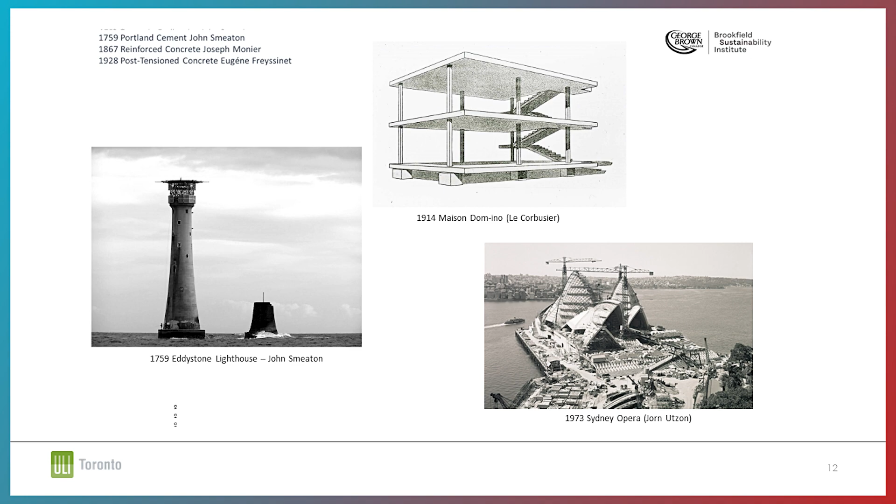This was happening at the beginning of the 20th century, around 1928, and at that moment Eugène Freyssinet, a French engineer, understood that if you put some iron and apply tension, you can have post-tension concrete, allowing big spans and new kinds of surfaces. This is the technology that allowed Jørn Utzon to give us the Sydney Opera House.

So the important thing here is to understand that some aesthetics, some architectural decisions, happen because of certain technologies. That happened in the 20th century, and now we are in the 21st century, and now it's the moment of wood, timber, mass timber. I think that's why we are here.

So the story of timber is the story of a problem: we have the limit of the length of the tree. You can use timber for structural elements however you want, but you're limited by how tall the tree is. Maybe here you have taller trees, but in Europe our trees are not that tall.

There was this French architect who wrote a book describing a way of joining small elements together to make a big element. It was called Philibert de l'Orme. So the De l'Orme system is how to join small elements just to make a big element. This is the key to timber, and the evolution of timber is this.

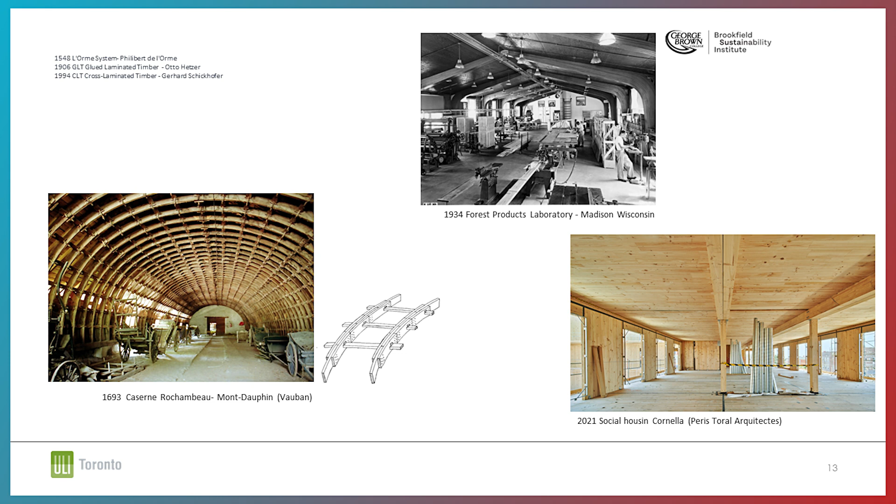It was used to do the coverings of castles and many churches in Europe. In 1693, you can see this caserne, which was a military element. Then at the beginning of the 20th century, there was this German engineer, Otto Hetzer, who understood and designed a way to glue timber.

So we don't need to make small joints, we can glue it in a way that it's able to resist exterior conditions, and that brings us to glulam.

So all through the 20th century, we had glulam. Here's one example of the first buildings made in America. I think this technology came to America in the 30s, and many churches and elements were built with it. So we have this potential: if we're able to glue it, we can have a linear element, but only in one direction.

But it can also give us the aesthetics of having big spans. And finally, in 1994, from the University of Graz, Gerhard Schickhofer invented cross-laminated timber. This was the big change, the big revolution, because now we're able to have elements in two dimensions. Before we only had the line, but now we have the plane, so we can work with this plane.

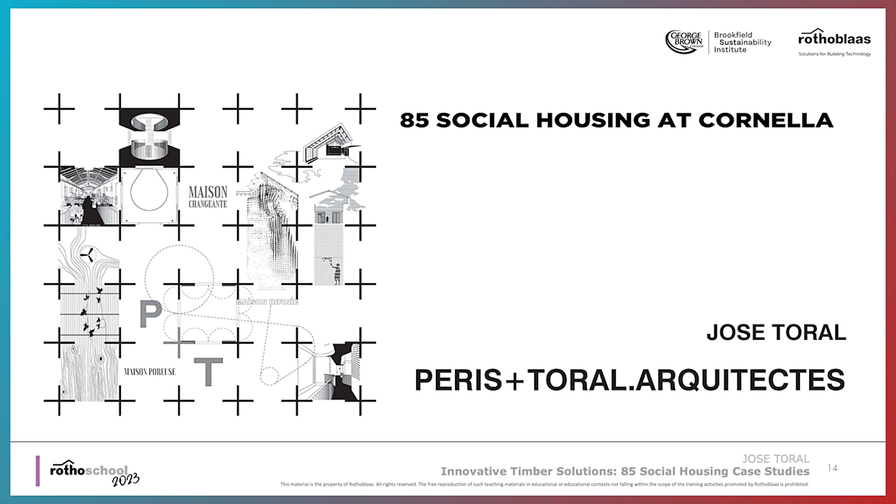Normally, from the technology to the architecture, it takes around 50 years. So we are now in a moment where we have to develop this technology. I will explain a project from my office in Europe that tries to show one of the possible solutions, but there are many others. I just wanted to show this evolution to understand why we're talking about mass timber.

It's because new technologies have come about, and we have to understand that some are good for our CO2 emissions, and that we have to work together on how this can be solved.

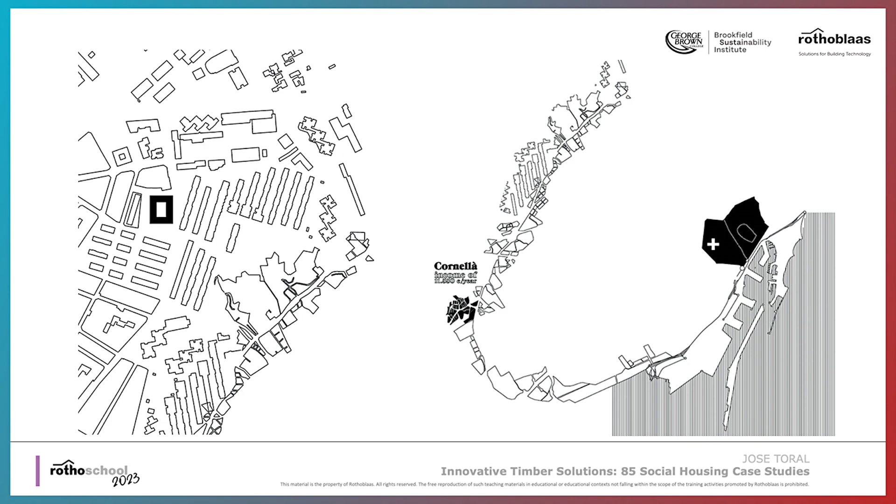Okay, this project is in Cornellà, but for you it's like part of Barcelona. Here you can see the city center—I don't know if I can point, it's a bit difficult—this is the city center of Barcelona, and this is the highway that goes around. So it's here. The important thing is that it's a very low income area, only 11,000 euros per year, so it's not the richer part of Barcelona.

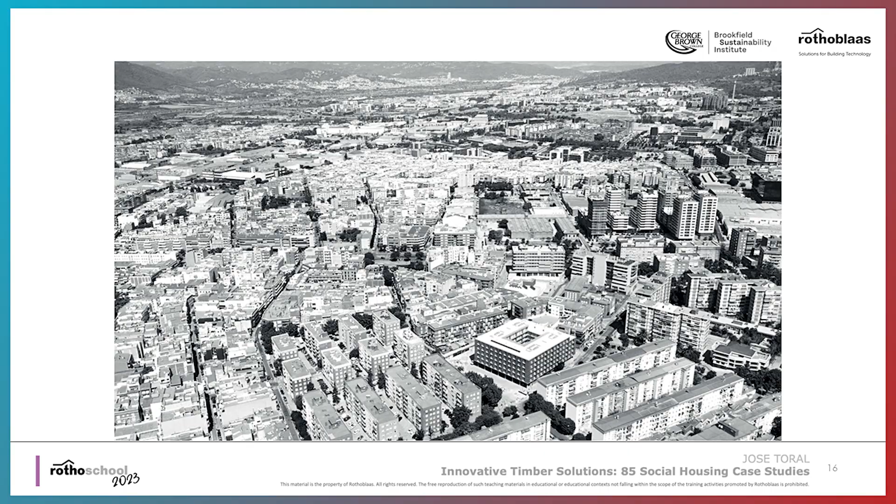This was built in the 60s with this polygon, with these block systems. And on the plot where our building is, there used to be a cinema. So people were not very happy when we decided to put a building there, because even though the cinema was closed, people would have loved it to be reopened.

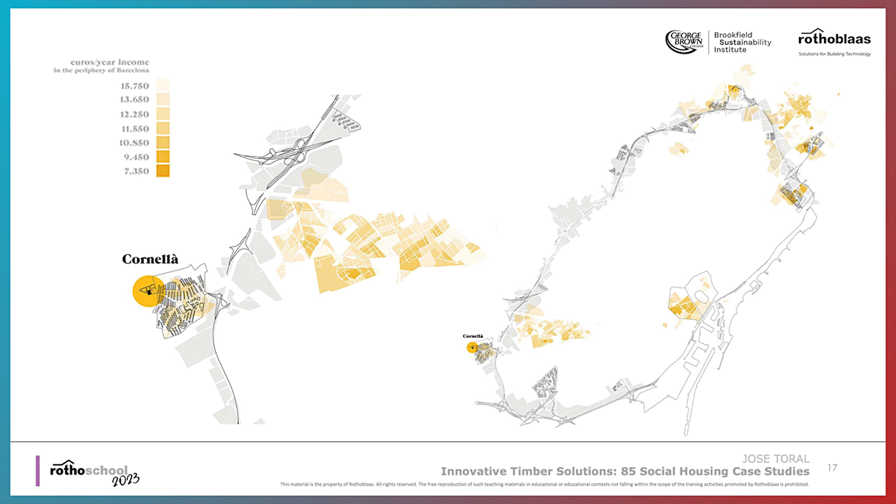But okay, here is the map, to understand Barcelona—this is the city center, and these are all the neighborhoods around it. Here the colors show the annual income, the darker meaning lower annual income. So it's a poor part of Barcelona city.

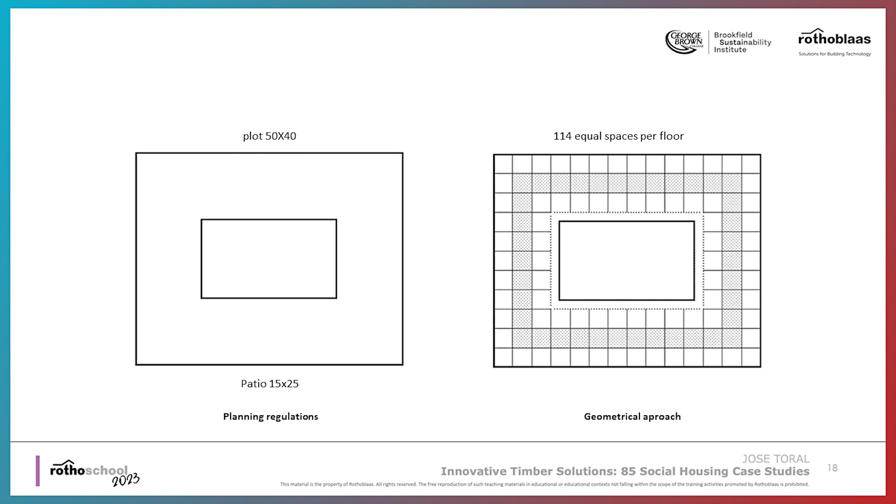We found this competition. We had this plot, and the planning regulations were very strict—they said you have this plot of 50 by 40 and you have to make a patio of 15 by 25. We weren't sure about entering the competition, but we decided, okay, we can't decide the answer for the city, but we can try to begin from the interior and give some geometrical approach.

And the question we asked was: how has to be the house of the 21st century? We thought it has to be different in some way. The idea we had was changing the aggregation unit. Normally you put one dwelling as the unit, the projectual unit, but we said maybe the unit has to be the room.

So what would happen if all the rooms in a house measured the same? Because when things measure the same, there is no hierarchy. For us, what links the project to the 21st century is this no-hierarchy situation. We think new kinds of families, even the nuclear family, don't need any hierarchy—it doesn't make sense that the parents' room is bigger than the children's room.

So if you have a house where all the rooms measure the same, it's more equal and more democratic, it's also more flexible, because when things measure the same you can interchange them—you can just move the furniture. But the question is, what should be the size of a room for this to happen?

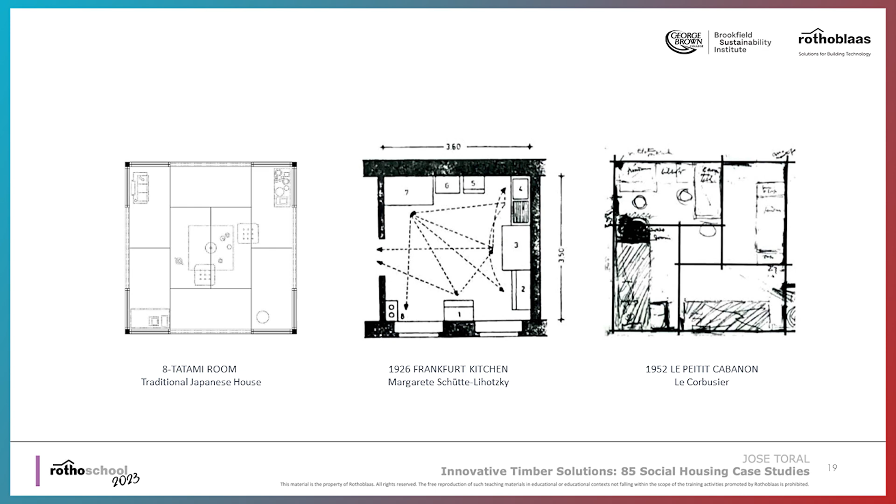We took this reference—my partner Marta made a PhD about the Japanese house. We found a very nice thing: in Japan they don't call rooms by their use, because the use changes during the day. Instead they call them by their size.

The size is based on the tatami. A tatami measures 90 centimeters by 1 meter 80—that's the size of a person lying on the floor, so more or less like a bed. This is an 8-tatami room, which measures 360 by 360, nearly 13 square meters.

The important thing is that the openings are double openings, so we have these porosities. So we decided to do the competition using this matrix of rooms measuring 360 by 360.

Afterwards, we found that the Grete Lihotzky kitchen of Frankfurt measured 360 by 350, and Le Petit Cabanon of Le Corbusier measured 366 by 366. So we have the more flexible room, the more technical room, and the room for thinking of Le Corbusier, all fitting in our matrix of rooms.

For the ground floor, we put the cores in the corners and decided that everybody will enter together instead of entering directly to each core from the street. We have a porch, and everybody enters through here. We have this patio as a communal area, and then we enter the building.

This part of the building is made with a concrete structure, so the distance between supports is 7.5 meters. We have a basement because we used to have a cinema, so we have some cinema facilities and a parking area.

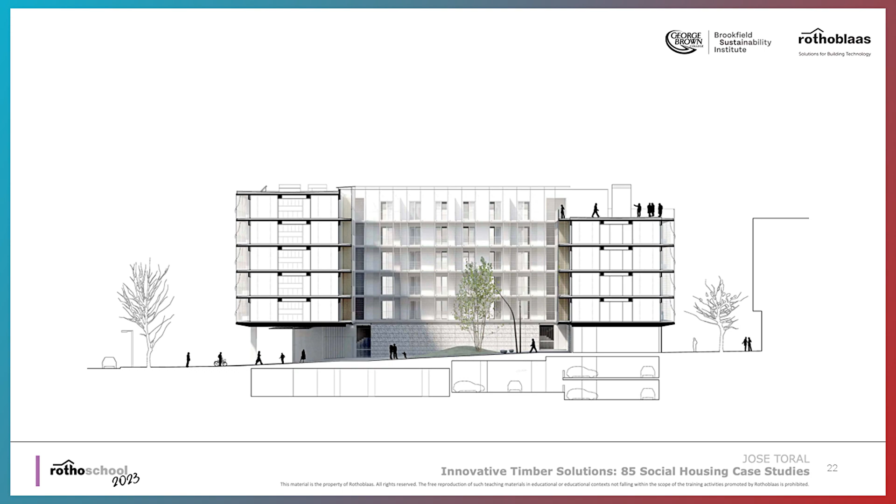It's important here, the section—from up to here you have the concrete structure, and from here everything is made with mass timber. We have this porch, and from the porch you enter the patio.

The important thing here is that this faces south, so we have hot air facing this facade during the day. But because we have the porch, this is very cold air, and cold air moves toward hot air—so that generates some microclimate and movement of air throughout the year.

This is the image of the porch and the entrance. For us, it's important that everybody shares the entrance—instead of having 4 communities, we only have 1 community. You can see the concrete structure up to here, and then the rest is all made with mass timber.

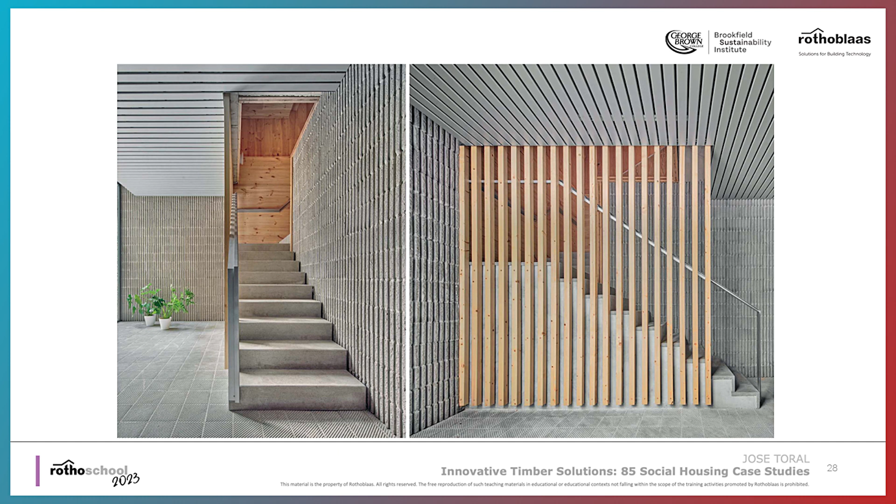You're entering—for us it's important for it to be closed, but not with a fence, more with a filter, because of the importance of transparencies. We're entering the cores in each one of the corners. Here is the moment where we change from concrete to wood.

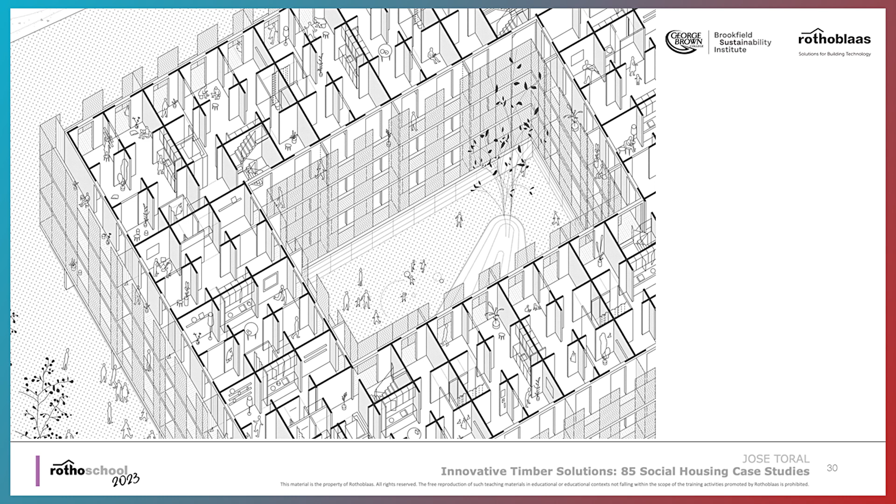And here everything is only wood. This is a stair, all made with mass timber—it came in one piece. I think we'll see some images afterward. All the metrics, all the elements, were fitted into the grid of rooms I told you about, even the stair.

See here, we have this situation of all equal rooms with this porosity between the spaces. So the importance of this plan is that it's not easy to see the limits between the different units or the difference between the communal area. All of them look the same—this is very important for us, this indeterminacy of the spaces, showing that in the future we can rearrange all the elements of the building.

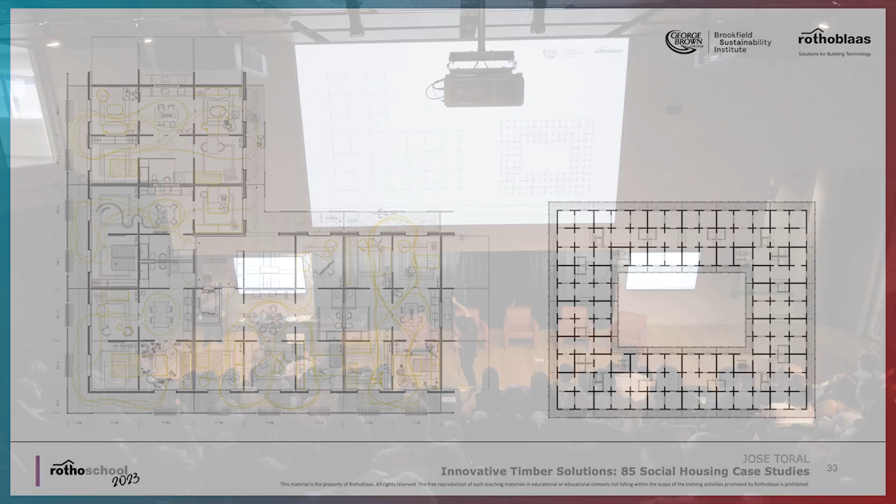But when you go closer—I don't know if it looks very well—but okay, here's the stair, and here's a communal room where you enter, and this is a corridor, and here you're entering directly to some of the dwellings.

Each one of the dwellings is normally 6 modules, 6 modules, 6 and a half modules, and these smaller ones are 4.5 and 4.5. It's important that you have all these connections between the rooms and wide openings between the spaces, so that even though you're in small spaces, you're able to see more than one space at a time.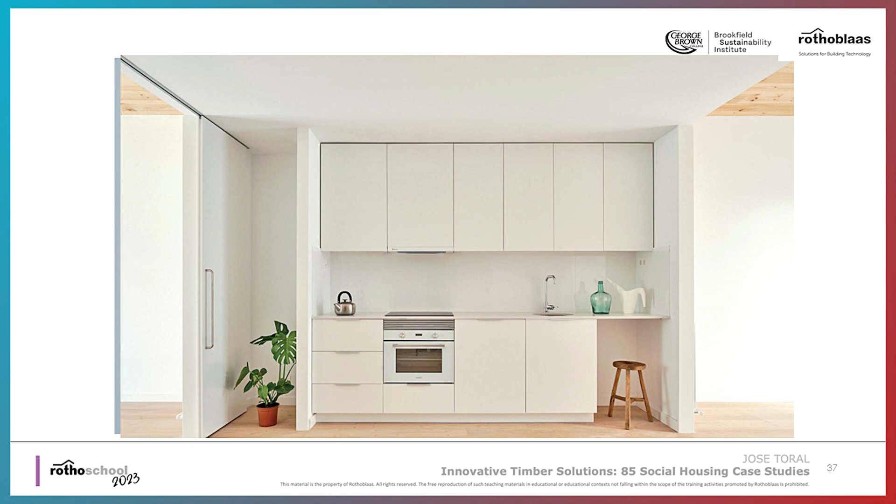Like putting the kitchen in the middle. That makes it possible to do a house without corridors, and also shows the importance of domestic work. So it's not something that is hidden, it's something that is exposed, that everybody has to work on.

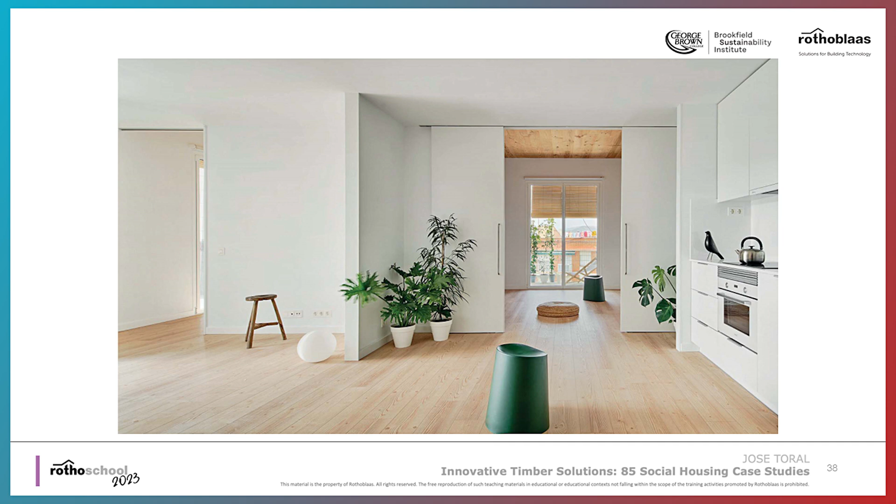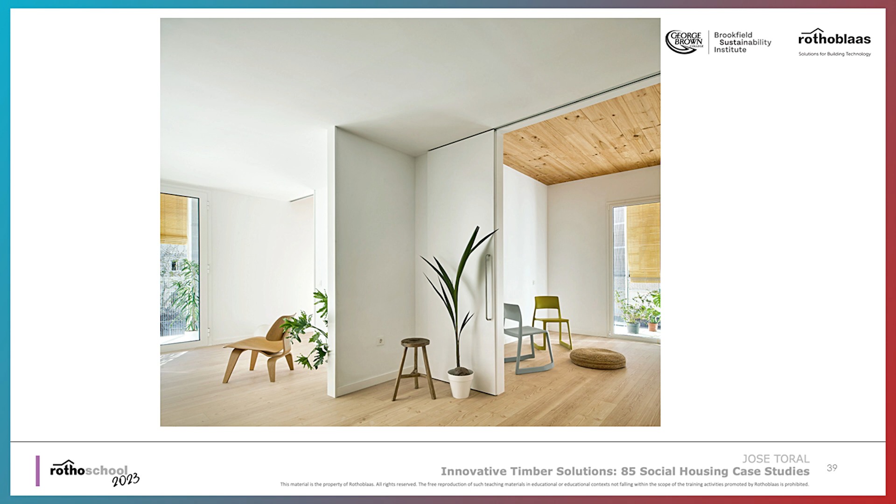You're able to see even 4 rooms from one point of view, this idea of these connections, and you can decide where to put everything. Then there's the importance of the corners: with the corners and the sliding doors, you're able to put furniture in the corners. The relation with the exterior is through an intermediate space.

It's important that we decided to leave the timber exposed, because when you expose timber it has hygroscopicity and has the ability to regulate humidity. We have very high humidity in Barcelona in summers, so this helps us regulate it.

We put the solar protection on the exterior part, which means we are able to generate some shadow and a special space here. Everything was decided to be white, so the reflection of the light, the ventilated facade, and all the decisions taken help generate some microclimate in the summer in these spaces.

But when you see it from the exterior, it looks more like a filter where you can see how people are living. So we have some fixed solar protection and movable solar protection made of timber.

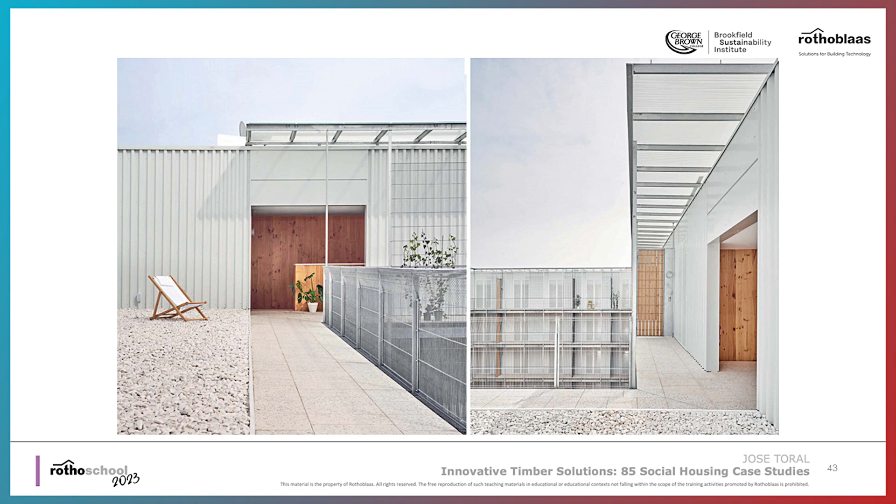When we go up with the stair, we have some communal spaces on the last floor. These are images under construction, and this one is finished.

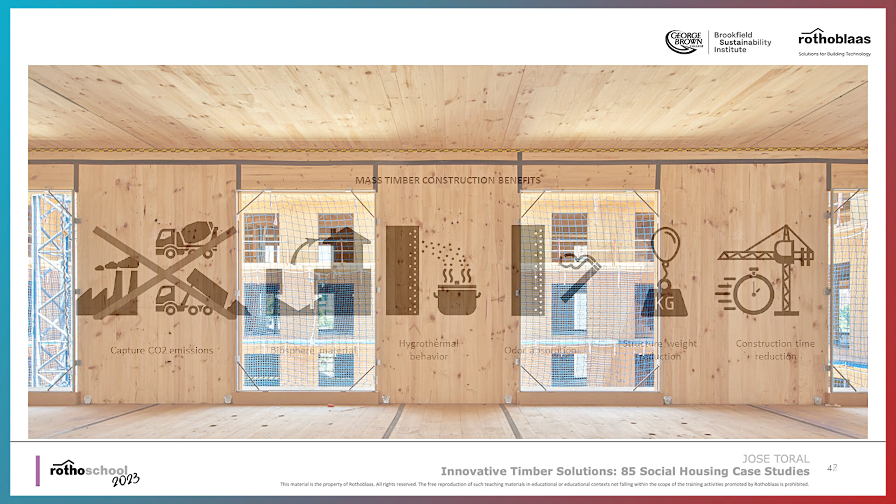And which are the advantages of building with timber? Maybe this is something you already know, but we can go through it a bit.

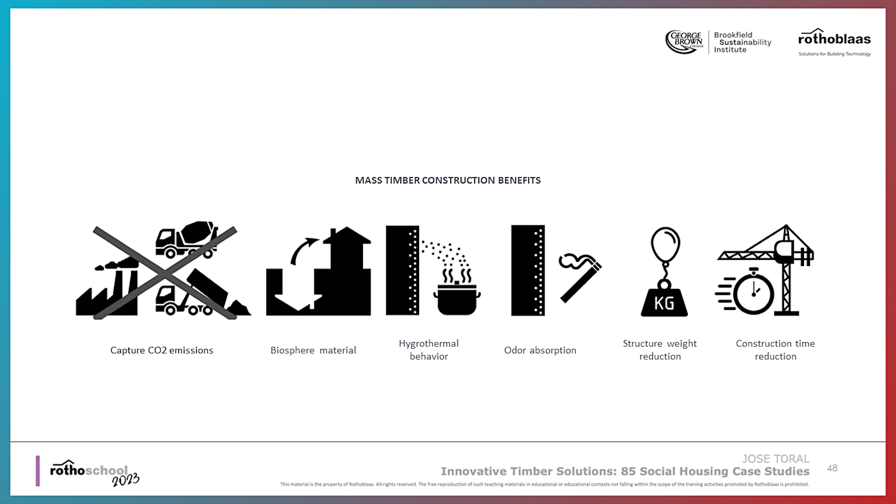When a tree is growing, it absorbs CO2, converts it to oxygen, and captures the CO2. The point is, at the end of a tree's life, if we let it burn or decompose, it liberates all this captured energy.

Instead of doing that, if we cut it and dry it, we capture this CO2. So we are able to use this CO2 as a material of construction.

It's also a material that is coming from the biosphere, so we can go back to it and it grows again. If we do good maintenance, we can have it for many years.

Also, if we leave the timber exposed, it has this hygroscopicity that's able to regulate humidity and absorb other elements. And it's a very light material, so the foundations of the building are lower, the cost is lower, and we can industrialize and make it faster.

So in some way we like to explain that these are benefits for society, these are benefits for the user, and these are benefits for the constructor. So all the agents have some benefits from using this technology.

But there are some difficulties, some challenges to solve. We have to solve fire resistance, cost, and the noise between neighbors in the case of...

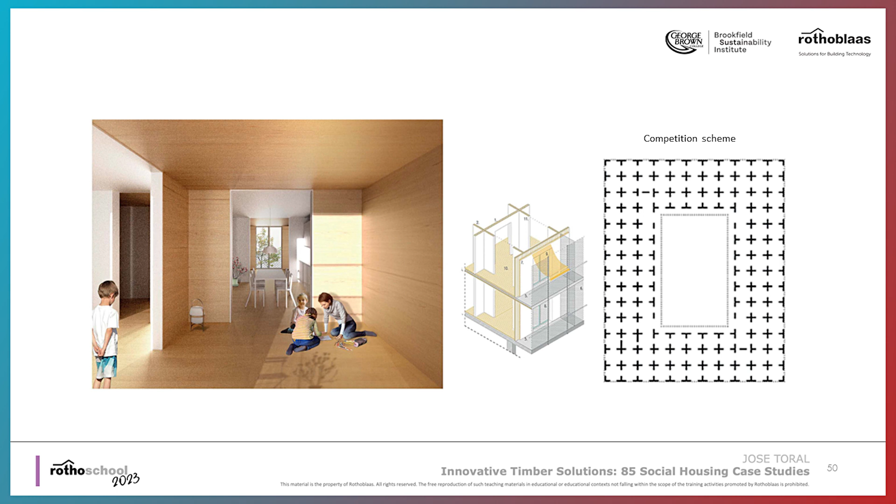So when we did the competition, we were thinking of making all the walls with CLT and making all the walls structural. But then we had to solve the fire-resistant regulations, and we understood there are two ways to solve the fire issue.

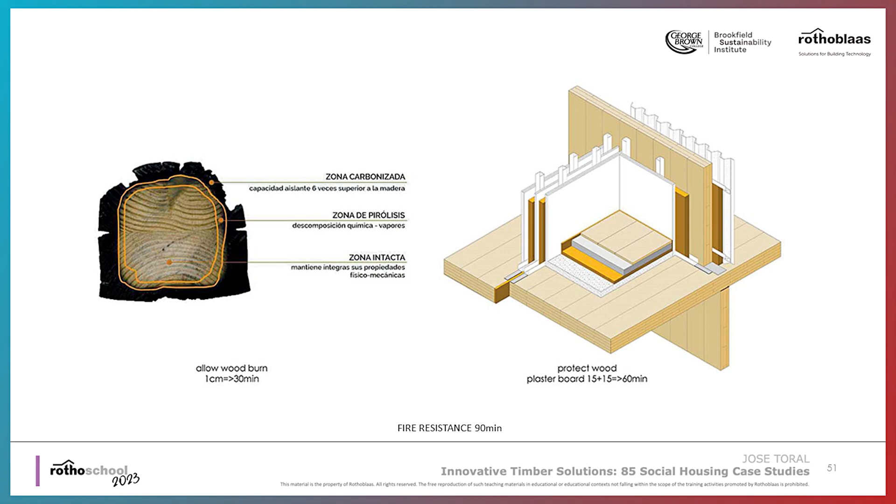One of the ways is to increase the section of the wood. If we put more wood than necessary, each extra centimeter gives around 30 minutes of resistance. In this case, the evacuation of the building needed 90 minutes of fire resistance, which means we had to increase each of the exposed faces of wood by 3 centimeters.

And that's what we did with the slabs. But imagine the other solution, the one we did on the facades: covering with plaster. We put 2 plaster boards, each one giving around 30 minutes also, plus 1 centimeter extra in the CLT panel of the facade.

But imagine doing this with all the crosses, all the interior crosses. We would have to increase 3 centimeters extra in each one of the sides, and it was not economically a good solution.

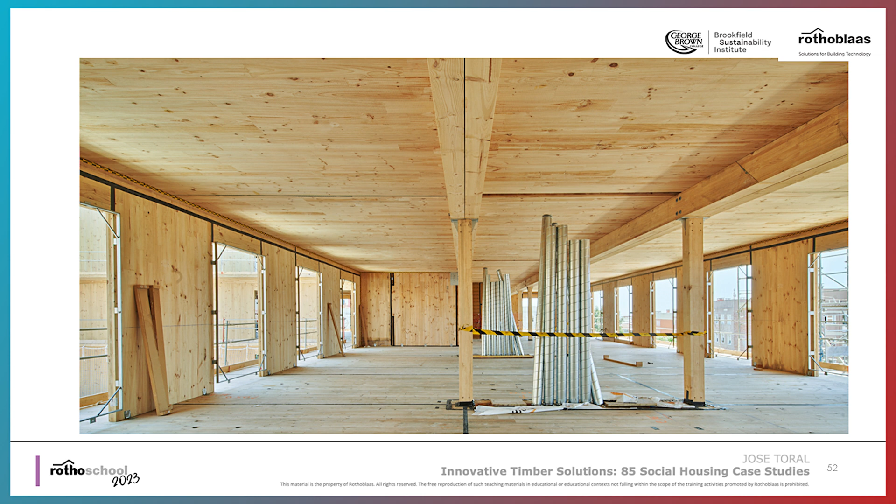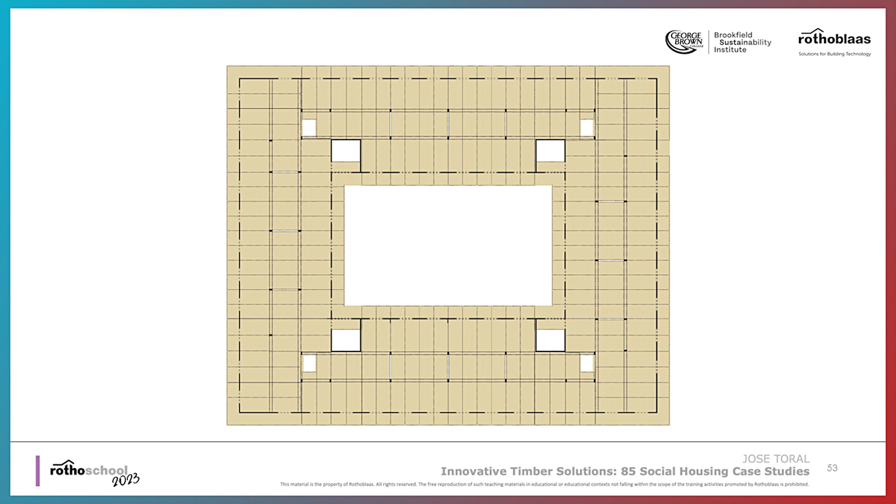So that's why we thought the best solution was using CLT for the slabs and CLT for the facades, but not for the interior part, changing the interior part for glulam. So that's why you can see this situation, and this is the final plan we did. You see all the facade and all the slabs with CLT, but in the middle, using the pillars and the beams with glulam.

And for the cost, we decided just in the competition we were worried about the amount of wood we needed because it was social housing. We had a very low budget, and nobody was expecting to pay more for this building because it was made of wood. Nobody asked for it to be in wood in the competition. This is something we proposed, so we had to keep the same budget as a standard building.

And that means that in the first situation we needed more than 15 centimeters. In the final situation we only needed 12 centimeters. We built it with 15 because we added the 3 extra centimeters needed for the fire to let the slab be exposed.

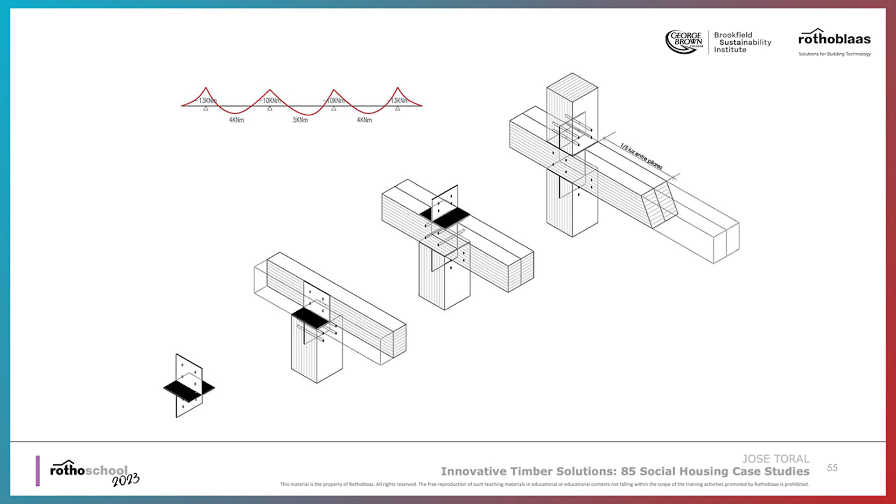And for the beams and the pillars we wanted to do the same, but the problem is you cannot have beams the length of the building, so you have to make joints. And making joints with timber is not easy. The easy way to do it is as an articulation, but it's very difficult to do a hyperstatic joint.

So going back to the bending moment diagram, making the joints where we have the most moment was not a good solution, because we'd end up with an articulation. Moving the joint to where the moment is 0 is a way of making the joint as an articulation but at the same time compensating moments. So we designed this piece that allows the beam to pass through, to this point that is 1/5 of the distance between supports. So all the detail is designed to compensate the moments and optimize the amount of timber.

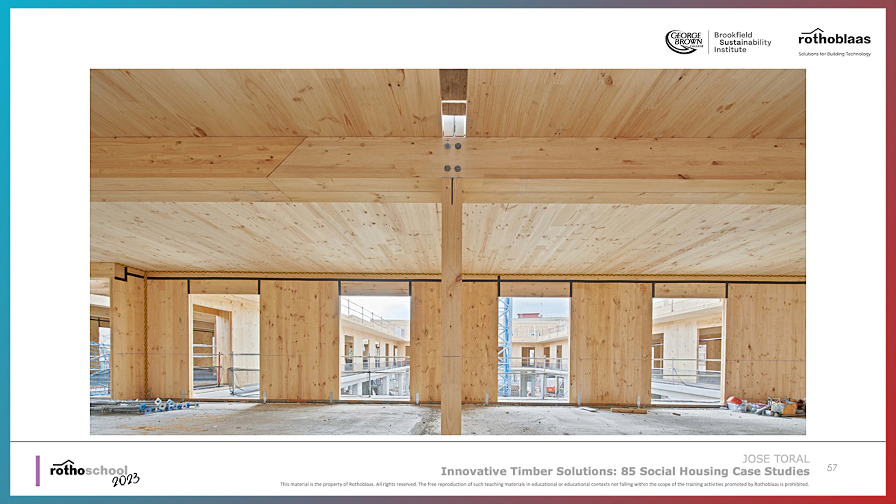So this is the piece. It was important for us — for me, this is a key element of the project. Once we decided on this element, we couldn't have planned the building otherwise. And here you can imagine, you can see how the bending moment is happening in the building. So it's interesting that the technical solutions are also showing us the aesthetical solutions.

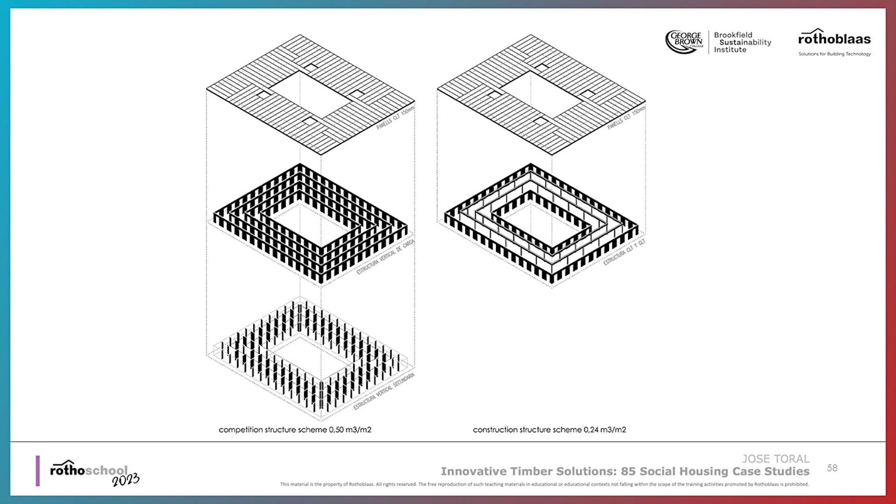And this is the good news: in the competition we needed 0.5 cubic meters per square meter of building, and in the final scheme we only needed 0.24 cubic meters per square meter. That means that with the same facade and the same slab, only changing the interior part, we used less than half the amount of timber. So I always say that even though building with timber is sustainable, building with half the timber is more sustainable.

It sounds funny, but some people say that since timber compensates some CO2, using more timber seems more sustainable. It's not like this. And finally, the more challenging thing was acoustics.

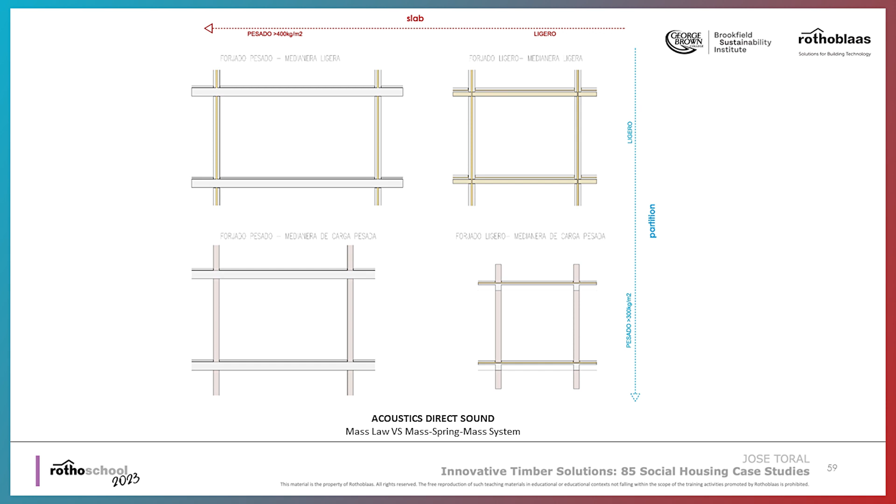The problem in acoustics is we have direct sound and indirect sound. So here we are in this situation. Normally we can use the law of mass with concrete — if we have more than 300 kilos we can solve the partitions, and with more than 400 kilos per square meter we can solve the slabs just with the law of mass. But since we wanted to take advantage of timber being a light material, we didn't want to go this way.

So we had to use the mass-spring-mass system instead, which means we have to work with layers: a mass, then a spring, and another mass.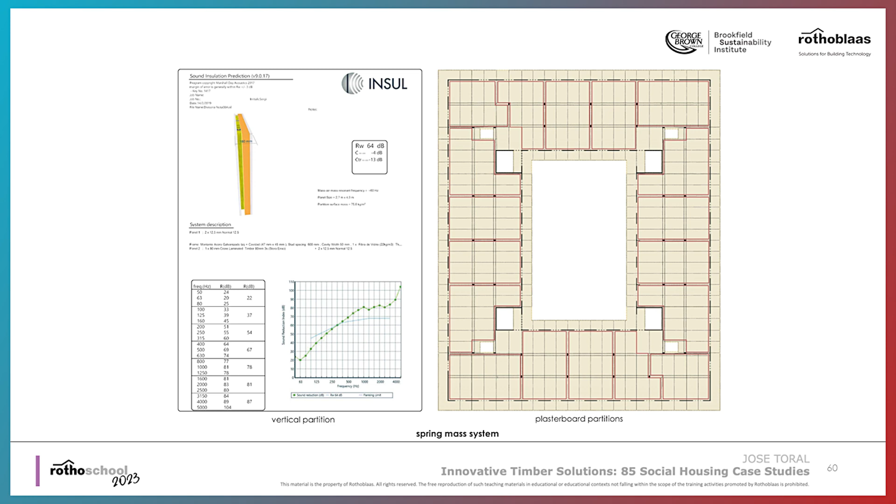So to solve the partitions, the good thing is that as we don't have CLT in the partitions, we can solve them with plasterboards. So we go to a standard solution of 2 layers of plasterboards. And the facade, I already explained it to you.

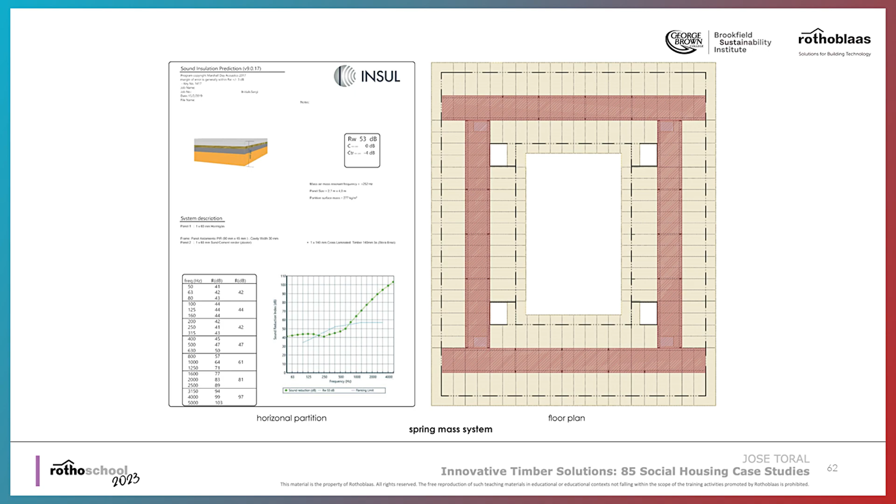So we can see here how it was solved. And then to do the slab, we have to add mass because the timber has not enough mass. So we add 6 centimeters of sand, that is from the beach. Then we put the rock wool to make the spring, and then we add 5 centimeters of concrete to make a floating continuous situation.

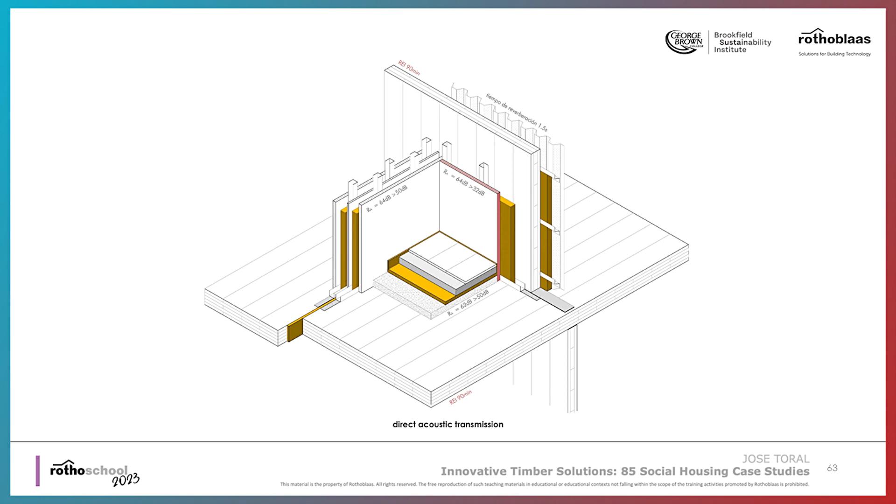Okay, so this is the details. And this solves the solution when the sound is going directly, so if the sound actually would do this, or would do this, or would do this, this solves it. But the problem is that sound is not doing this. What happens is that it goes to the slab, and instead of only going there, it moves horizontally. And from here, this is vibrating, and is able to let the vibration to the slab beside, and then we have this acoustic break or bridge.

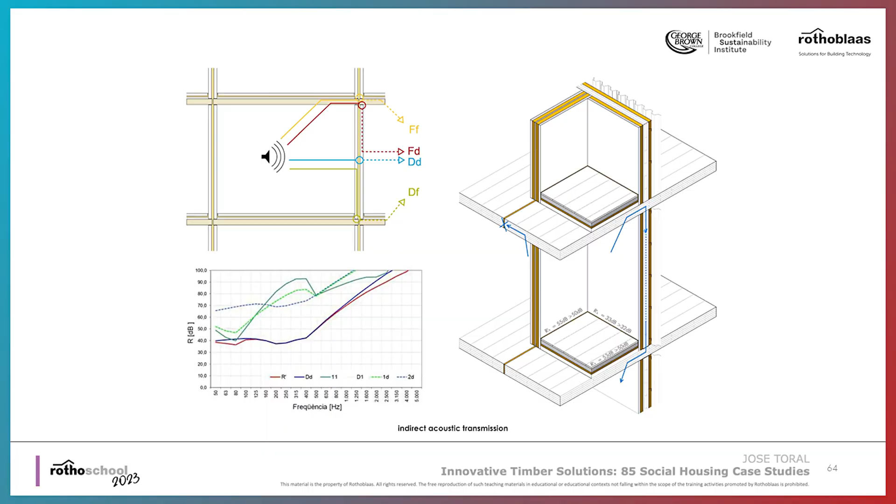The point is, what we did is we decided to cut the slabs in order that we don't have this continuity. So we talked with our acoustics, we put an acoustic band here, so that means that you have to be very rigorous with the structure and the plan.

But there are more bridges. Maybe somebody talks here, this is a structural element, it makes a vibration, vibrates the CLT of the facade, and then it makes vibration here in the slab underneath. So there are some joints here that you can pay for. I think Rothoblaas have some very beautiful joints. We didn't have even money to pay for that.

So, but we made some simulations, and we understood that each time the sound has to make a movement of 90 degrees, it loses 30% of effectivity. So with two 90 degree situations, the effectivity was so low that it was not considered a bridge. So we just try to solve it that way.

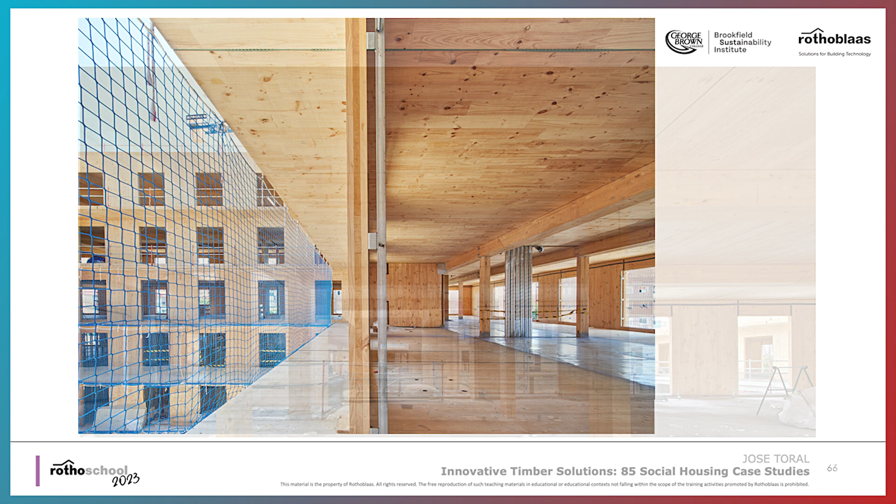And this is the final plan. This is the material used, where you see all this connection of the construction and the plan. Here you can see these joints in one direction, here in the other direction.

And finally, one of the advantages of the fast construction. This is the first week, 2 weeks. The first week is complicated because when you begin from the concrete, we have 5 centimeters from one corner to the other of difference, so we have to put this piece of wood in the base. But then here we can go a bit faster.

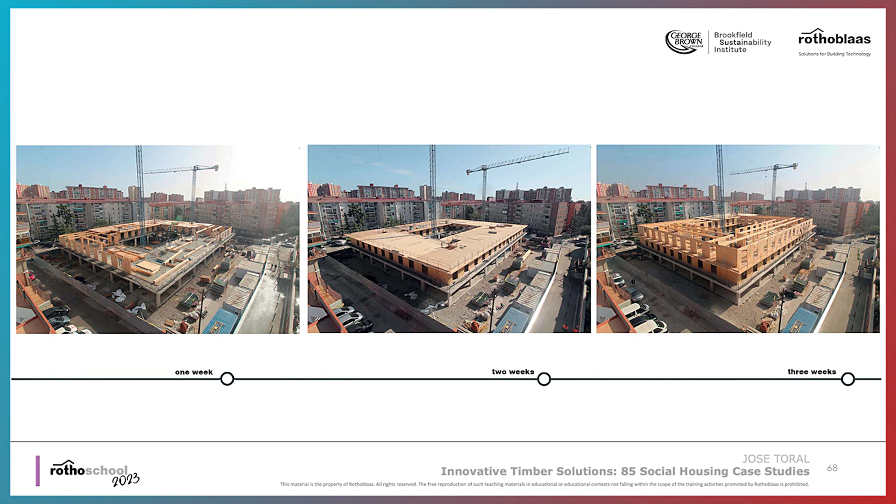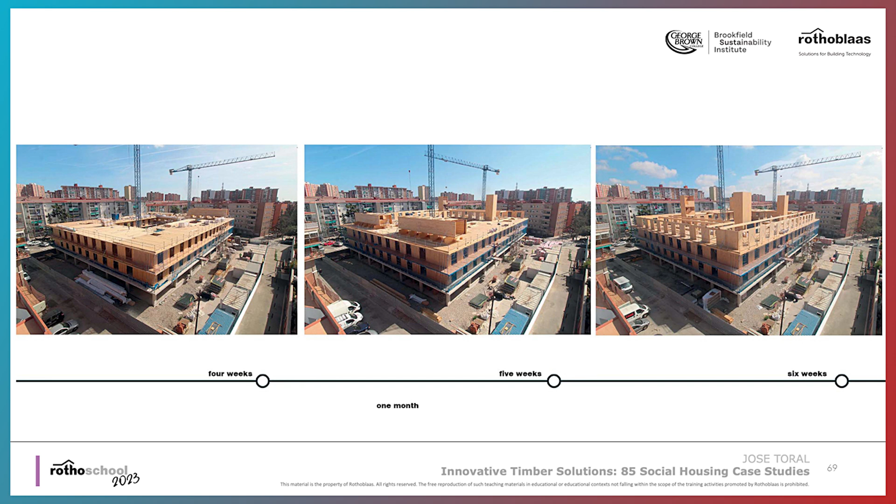So, 4 weeks, this is the point where we are making the stairs. This is the element of the stairs that will come in one piece, so they build it here, 5 weeks, 6 weeks. The interesting thing here is that the stairs is the structural element that allows the building to solve the horizontal action of the wind, but we cannot put them at the beginning because they will fall because of the wind. So we have to do 2 floors, then put the stairs inside.

It was like the kids' games that you have to put it, it doesn't fit sometimes. And then at that moment, all the construction is going around like the stairs, the towers. Okay, and in 9 weeks, in 2 months, we are able to build these 5 stories mass timber construction. And then the nice thing is from the first week, you can also work underneath.

So you save a lot of time. And here you see this is the image of the stair and how they were fitting it when we had these two stories. Thank you very much. Thank you.

Thank you, Jose. Yeah, I feel like I've just been in a master class of how to build a really, really smart mass timber building.

You may be shocked, the cost of that building was $150 a square foot, because social housing budgets in Spain are not that dissimilar from the ones in Canada. I think our social housing budgets per square foot are considerably higher, but that shows you the kind of ingenuity that you needed to bring to bear on a project to make it viable. And I thank Jose for sharing that with us tonight.

It's now time for our panel discussion. This whole panel was inspired by the mass timber panel that we had at the ULI during the summer, where we were discussing whether mass timber would only be a solution for luxury buildings or premium buildings.

And so the challenge was on to try to find out if we could demonstrate that mass timber could be a solution for affordable buildings, and could those buildings transform our cities and enable more affordable housing, the missing middle, as we were calling it. So now I'm going to invite our esteemed panelists to come up and discuss whether we can crack the affordability problem with mass timber.

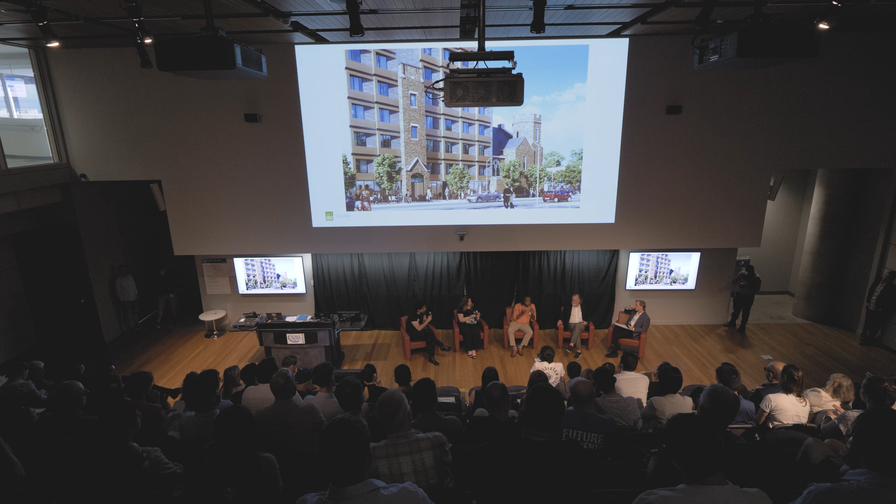But the presumption of how you get there depends on how you multiply the number of housing, social housing communities that you build using mass timber. To do that, we talked about the actual cost of concrete versus timber, and also the design. But I think the most important thing is the kind of partnerships that we need, including the partnership we have with them and other nonprofits partnering around this kind of innovation. That is part of the value of nonprofit housing, to be able to be at the forefront. If enough of us can get into this kind of building, and especially when you can see it delivers quality, we start the journey of creating an industry around this.

And it's only when you begin creating an industry out of the production of housing that you're going to start getting to the answer of scale. Because that now starts to impact the whole value chain of construction and design, and for us also down the road, we're very interested in how it connects with employment for the constituency of people that we house, so that they become part of this new thing, because they were locked out of the concrete industry type of affordable housing.

Yeah, and Jose, I see you coming in. Feel free, folks, this is a friendly environment. Feel free to jump in.

No, just, okay, I have no doubt that in 20 years it will be much cheaper building with timber than building with concrete. There's no doubt, this is not something we have to question. It's going to happen. In Europe now the problem is the factor of scale, the economy of scale.

Now they are investing in many of the plants making CLT. We have plants that are normally able to do 50,000 cubic meters a year, but now they're investing to be able to do 200,000 cubic meters or a bit more. Now we have like 2 or 3 enterprises doing that.